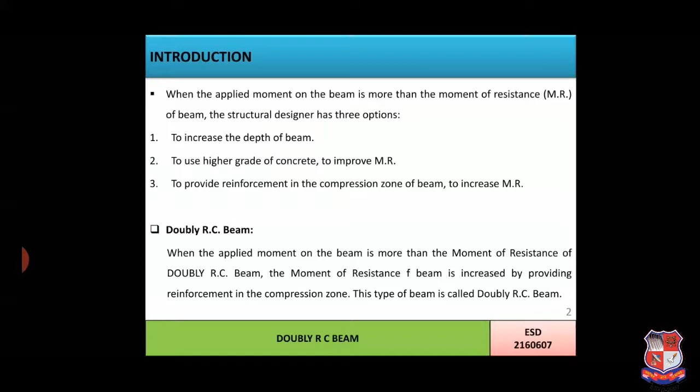Now, moving further, the next slide. The necessity of doubly RC beam means why we need to provide the doubly RC beam. Usually, a doubly RC beam is provided in the following circumstances. First, when it is not possible to increase the depth of the beam due to architectural purposes. Second, to get more headway in the room, which we already discussed in the previous slide. Third, when the beam is subjected to a reversal of stresses, which usually occurs during earthquakes.

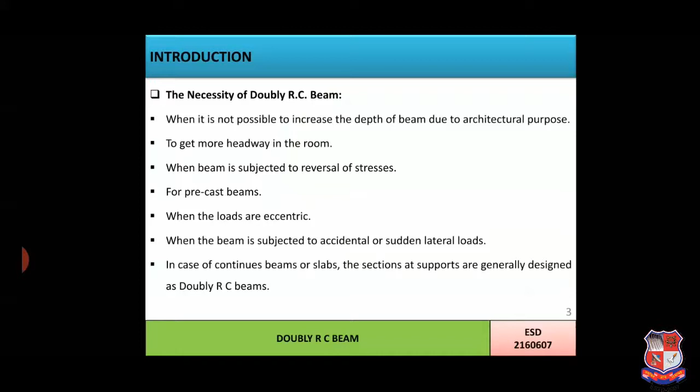For precast beams, when the loads are eccentric, that means not acting at the center, that is, we can say non-axial load. Next, when the beam is subjected to accidental or sudden lateral loads. And last, in case of continuous beams or slabs, the sections at the supports are generally designed as doubly RC beams. So these were the requirements, or we can say necessity, of the doubly RC beam.

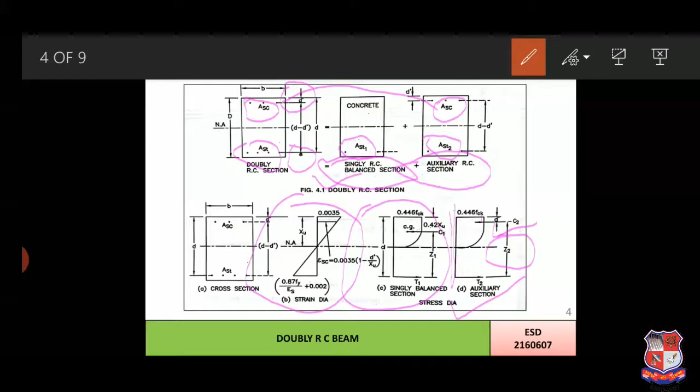Now an extra lever arm will also be generated in this case, denoted by Z2. To calculate its formula, it is simple: D minus D dash gives Z2. So this is the basic concept of the stress strain diagram of doubly RC beam.

Now the notations of the diagram: B, width of beam; small d, effective depth of beam; capital D, overall depth; XU, depth of neutral axis; E, effective cover to tension reinforcement; D dash, effective cover to compression reinforcement;

AST1, area of tension reinforcement required for the balanced singly RC beam; AST2, in the auxiliary section, area of the additional tension reinforcement; AST, area of the tension reinforcement for doubly RC beam; ASC, area of the compression reinforcement; FSC, stress in compression reinforcement; FCC, compressive stress in the concrete at the level of the compression steel; FCK, compressive strength of concrete; and FY, yield strength of steel.

Two new terms have come, FSC and FCC, that will be discussed in further slides. First, let's understand the formulas for the singly balanced RC beam and auxiliary section. For the singly RC beam, all forces are the same as in the previous lecture: C1, force of compression in concrete, 0.36 FCK B XU; T1, force of tension in the steel, 0.87 FY AST; Z1, lever arm of the singly RC beam, D minus 0.42 XU. These formulas are the same in this case.

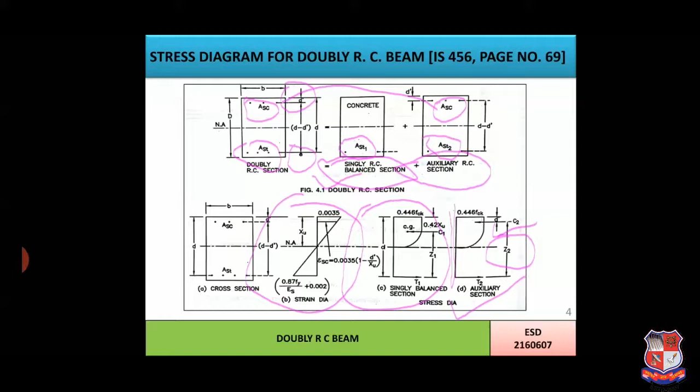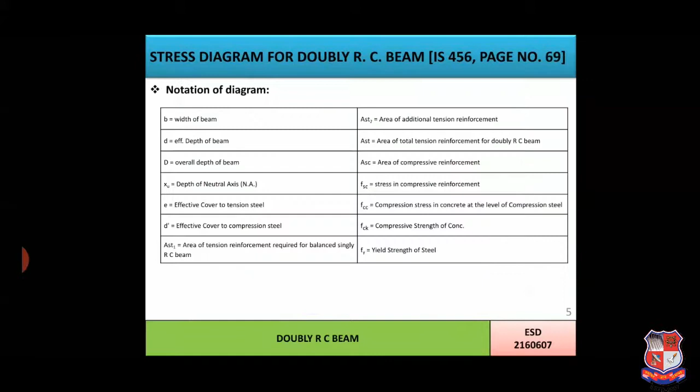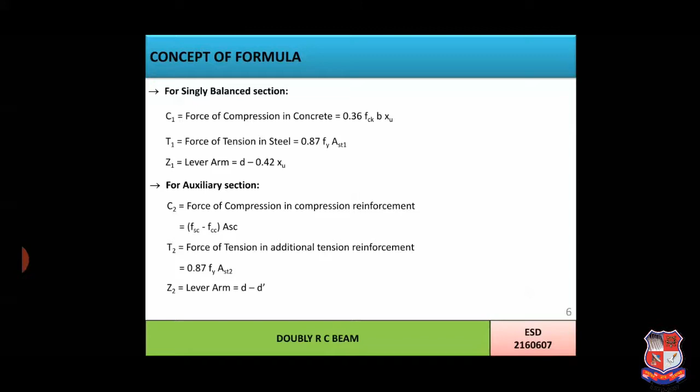So, we are discussing this one, that is the balanced singly RC beam stress diagram. Now we should concentrate on this diagram for the formulas of C2, T2 and Z2. C2, the force of compression in the compression reinforcement, is (FSC minus FCC) into ASC; T2, the force of tension in the additional tension reinforcement, is 0.87 FY AST2; and Z2, the lever arm for the auxiliary section, is D minus D dash.

Now moving further, as we already said in the previous slide, we should understand the concept of FSC and FCC. So first of all, let's start with FCC. FCC equals the compression stress in the concrete at the level of the compression steel. So for D dash by D ratios up to 0.20, FCC is usually taken as 0.446 FCK. And talking about FSC, the stress in the compression reinforcement: for MS bars, that is plain bars of grade Fe250, FSC is taken as 0.87 FY. And for HYSD bars, HYSD means high yield strength deformed bars, FSC is obtained from the following table given in SP 16, table F, page number 13.

Now as we can see in the table, the value of FSC is different for different D dash by D ratios and different grades. For example, if the D dash by D ratio is 0.05, then for Fe415, FSC's value is 355. If it is 0.10, then it is 353. If the ratio is 0.15, FSC is 342, and if the ratio is 0.20, the value of FSC is 329. If the ratio comes to 0.08, then we should consider the higher value, not the lower, so we should consider the value for 0.10.

Similarly, for the grade of Fe500, different values of FSC as per the different D dash by D ratios are also there. Hope you guys are getting my concept of D dash by D ratios and the value of FSC.

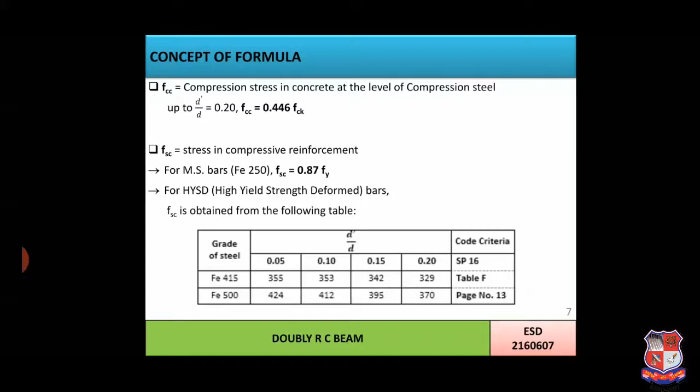Now, the basic difference between a single RC beam and a double RC beam. First of all, the cross section is different. As we already understand the basic content of the single RC beam, only one reinforcement is there in the bottom zone, meaning the tension zone, while in the case of a double RC beam, two reinforcements will be there. Second, in a single RC beam, tension reinforcement is provided in the tension zone, while in a double RC beam, tension reinforcement is there in the tension zone, but at the same time compression reinforcement is also there in the compression zone.

Third, in a single RC beam, in the compression zone, two numbers of 10 mm dia anchor bars are provided. The anchor bars are not designed to carry any compressive force. We had already discussed that compression reinforcement is not required in a single RC beam, but we need to provide two anchor bars to support the stirrups provided in the beam as shear reinforcement. While in a double RC beam, compression reinforcement is provided in the compression zone, which will resist the compression force, because it is a requirement criterion.

Fourth, when MU is less than MU limit, the beam is designed as a single RC beam, while if MU is greater than MU limit, the beam is designed as a double RC beam. Fifth, the moment of resistance of a single RC beam is less, while in a double RC beam, MR is higher. Sixth, a single RC beam's ductility is less, while a double RC beam's ductility is higher. Seventh, it is not suitable where there are chances of reversal of stresses, meaning in the case of an earthquake a single RC beam is not that preferable, while a double RC beam is quite preferable during reversal of stresses. So guys, hope you got all the concepts of the double RC beam.